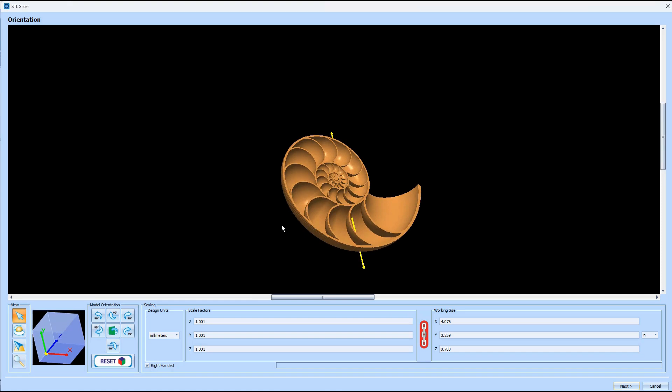In this tutorial, we're going to be using this shell to demonstrate how you can reproduce a three-dimensional object by creating a double-sided carve. We're going to use STL Slicer to export both sides of this pattern.

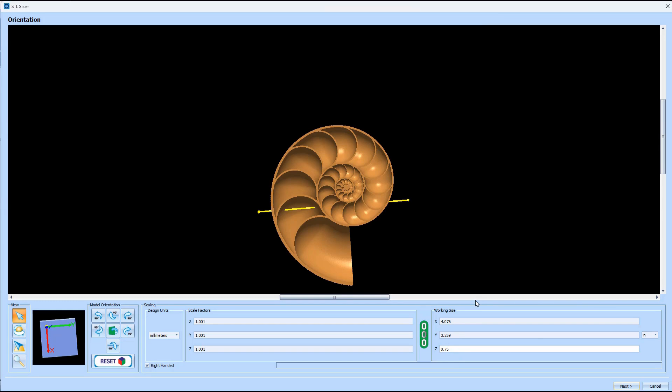Now to do this, let's start off with unlinking the dimensions here. As you can see, this is 0.780. I'm going to make this out of a 3/4 inch piece of material, so I'm going to change that here. Click off, that sets the dimensions, just shallows that just slightly so it's going to fit in my workpiece. And go ahead and click next.

Bring me into my slicing plane. Now the green, anything past the green is going to show up on my slice. So I'm just going to go ahead and click slice here. That's just going to define that slice, and then I'll hit next.

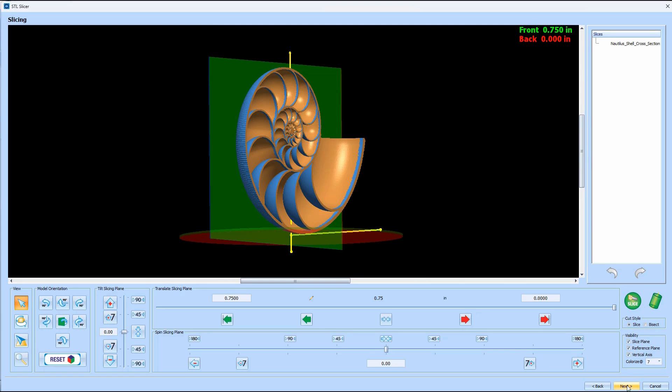That's going to open me up into this screen here, which shows me my models. Now I want both sides of this, so over here where it says two-sided, I'm going to click on that. That is going to allow me to export both this side and this side of the pattern. Now you can see this is going to go ahead and default make a directory named what this original pattern was and drop that into our pattern library. I'm going to go ahead and accept that and click Finish.

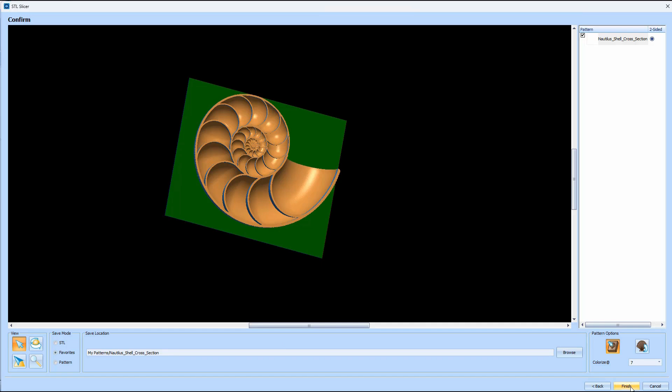Okay, I've gone ahead and created a board here. I'm going to cut this out of basically a 1x6, so set my thickness to 3/4 of an inch. And you can see we have created the patterns from the STL model.

So I'm going to start with the front face of that shell. Now the first thing when we are going to be creating something that we've imported in from slicers, we want to be sure to uncheck this scale to fit board down here at the bottom of our pattern library. Make sure that's unchecked. We don't want anything sweeping in and scaling or changing our pattern in any way.

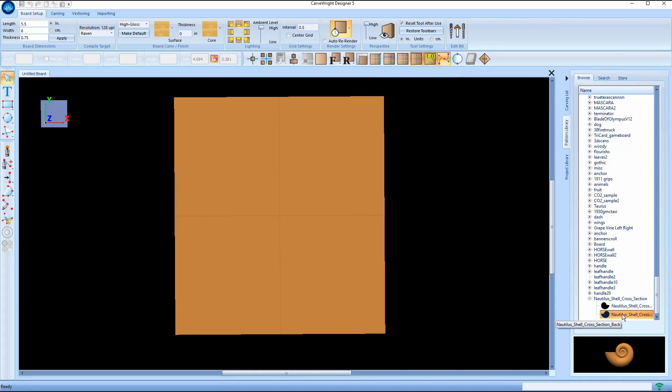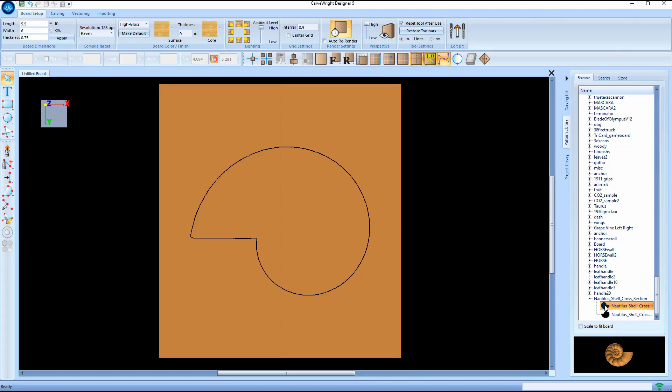So I'm just going to go ahead and drop this on our board here, and I'm going to go ahead and tell it to center up both. Okay. Now I'm going to go to my back side, and you can see we see the outline of where that pattern is. Now I'm going to go ahead and drop the other side. You can tell which is which by just looking at the small preview pane here right underneath the pattern library. So I'm going to grab that one and drop that onto the board.

Okay, I'm going to go ahead then and rotate that 180 degrees, and then also tell that to center up both. Now you notice those both line up there. When it creates the patterns, essentially it creates them with the same coordinate system. Now it just makes it simple to go ahead and center these here, but I could have actually located them using one of the corners on both front and back.

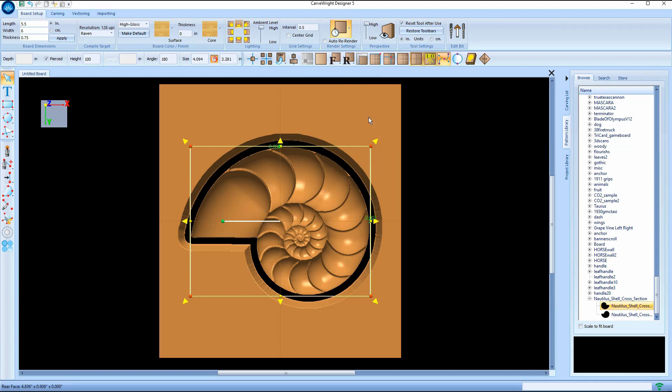Now you can see that this obviously, if I continued on along this method, I would actually be carving out this whole back section here, and this piece would be floating free. That's clearly not what we want to do. So the first thing to note is that whenever we drop a pattern onto the board that comes in from Slicer, it's automatically going to put it as pierced.

Now let's uncheck that. And you'll notice that when it does pierced, it's actually making it a little bit deeper. Now we made that 3/4 of an inch, but it's adding another 0.008 to make sure that it pushes it through the board. We don't want to do that in this case, so the first thing we do is take it back to our actual dimension that we want.

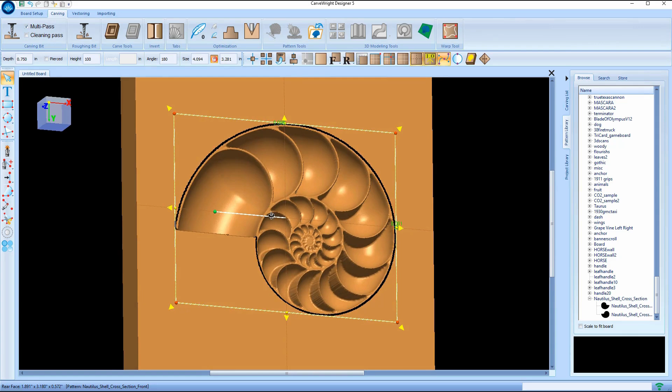We're then going to go to carving, and we're going to turn off our feather. So we want no feather here. We're also going to take off our floor feather. We don't want that as well. We're going to go to bit optimization. We're going to put that on best, and we're going to give ourselves a small draft. And we might come back a little bit later. Some of these may be a little bit thin. We might go add a little bit more draft to that a little bit later. But for right now, that's going to take care of what we need to worry about at the moment.

We're going to flip back to our front face. We'll click on our pattern. Now here you see we do have a feather on this, but we're actually going to go ahead and take that feather off as well. And we're going to go and outline this pattern.

We're going to take that outline and we're going to offset that path. Now the amount we offset is dependent upon the bit I'm going to be using. Now I'm going to be using a 16th inch bit, so I'm going to go just a little bit beyond that.

I'm going to go 0.15. Now if you click OK here, it's going to show you where that's going to end up. So it's showing you the dotted line. So we're going to go ahead and click OK.

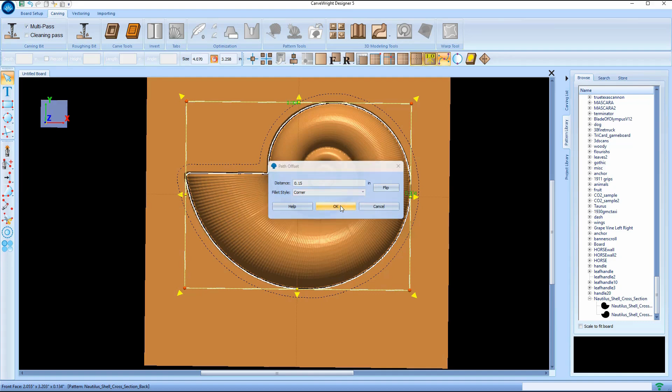And we're going to go back to that one, and we are going to go ahead and create a region, and we're going to tell that one to pierce. We're also going to go ahead and give it just a little bit of a feather on there. Now notice that the feather is moving towards the inside, so we're going to go here right next to feather, is feather with the little arrow, that we're going to flip it to the outside of that region.

And we're going to come back and clean up and optimize our shell on this side here. So first thing we're going to do is we're going to bit optimize that to best. We're going to go over here again. It's got that pierced. We're going to take away that extra 8 thousandths.

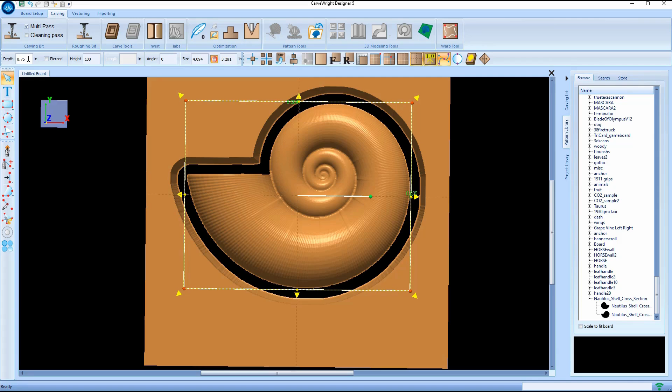Now we do have a cliff edge over here, so we will go ahead and put a small draft on that. It's not really necessary, but it just keeps us from cliff edging, which can give us a jagged edge over there.

Okay, now this is basically the same method you would use whenever you were going to be piercing something out, cutting it out. You create the region around it to give room for the bit to go all the way through. So the next thing we're going to do though is we don't want to have this just floating out here when we carve it out.

So we're going to put some tabs in. Now to do that, I'm going to go over, I'm going to grab my line, and I like to go to my board setup and then this tool right up here, reset tool after use.

If you can see where my mouse is going back and forth, right up here, we're going to go ahead and uncheck that. Now this function keeps it so that if you draw something or you do something, it will always default back to your arrow. When we unselect that, it will mean whatever we've selected here will remain persistent.

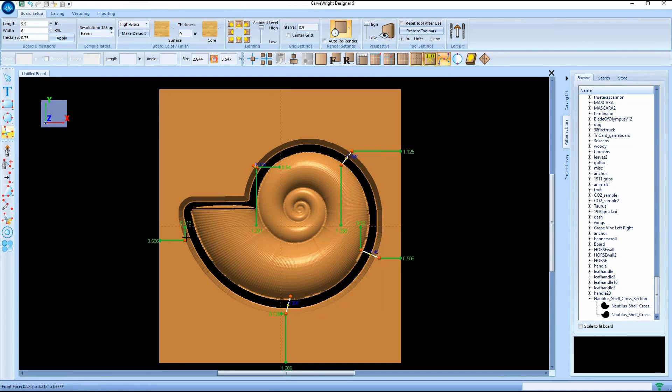So I can go drop lines in wherever I want, however many tabs I might think I may need. You can kind of decide however many you want. Now then I can unclick that, and that'll put me back such that when I do a function, it will default me back to my arrows.

Now I'm going to go to carving, and I'm going to go ahead and just click on the tab function. Now here we can change the styles of tabs we want. We can change the width, we can change the height. We can also change the depth.

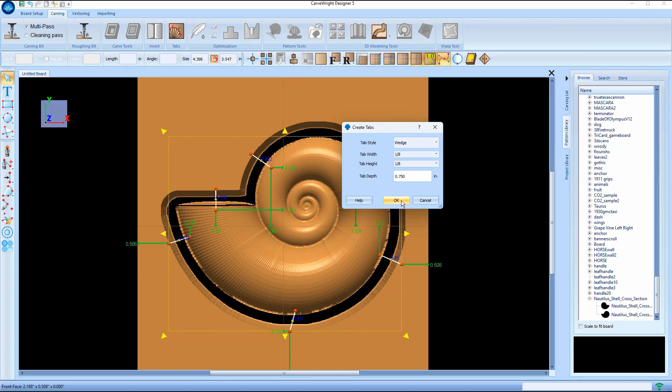Now if I had allowed that backside to pierce through a little bit more, then I could have actually moved so my tabs would be higher up on this. Of course, with what we're doing here, we don't want that to do that at all. So I'm just going to go ahead and say OK.

Now I'm going to do a final look at everything and just kind of do an inspection. First thing I notice is there's no way that these are ever going to come out. They're just too thin. So I'm going to click on that pattern.

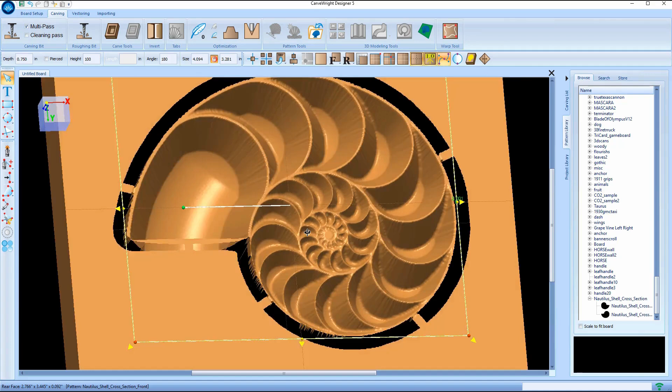I'm going to up my drafts. That might be a little extreme, so we can go to a custom draft. We have from 0 to 32, so we can just start inputting numbers and just kind of look at it and see, yeah, that's definitely better.

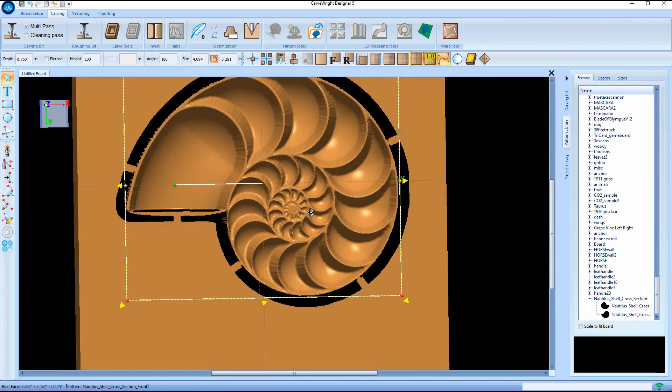Let's try a 6. We can kind of back down to maybe a 4. We can kind of bracket it from both sides. I think I'm going to go back to that 5. I get a little more in the larger areas than I would like, but I'm pretty confident that with the 5, I'm going to actually have these sections come out for me.

Now the only other thing that we want to look at is, let's click center that up, is we want to think about our thickness. So I'm going to go here to the edge over here, and down at the very bottom left hand corner you will see the dimensions that we have here. So as I move my mouse, you'll see the third one there, the 0.67779, that is telling me the thickness.

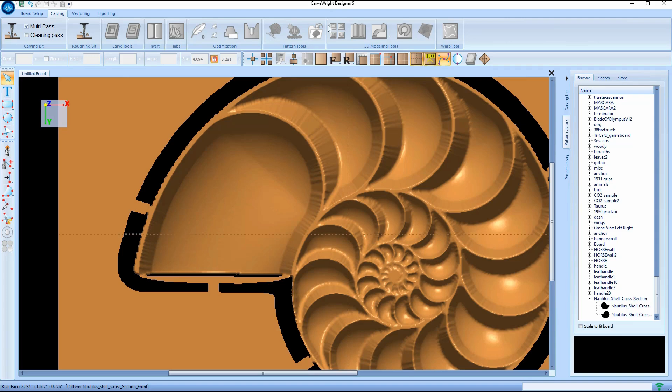So if I'm not entirely confident that it's going to have enough thickness in this when I'm done, I can check it, and I can check that with regard to what I am seeing on the front side. And I might go ahead and just shallow this up a little bit more, just to give myself a little more meat.

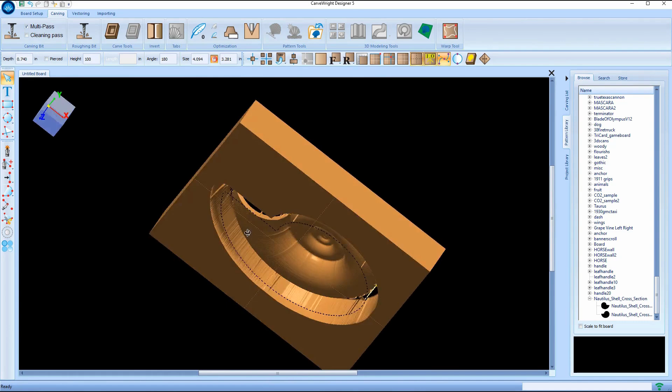Once you're confident in that, we can go ahead and compile this board, and let's go ahead and give it a carve.